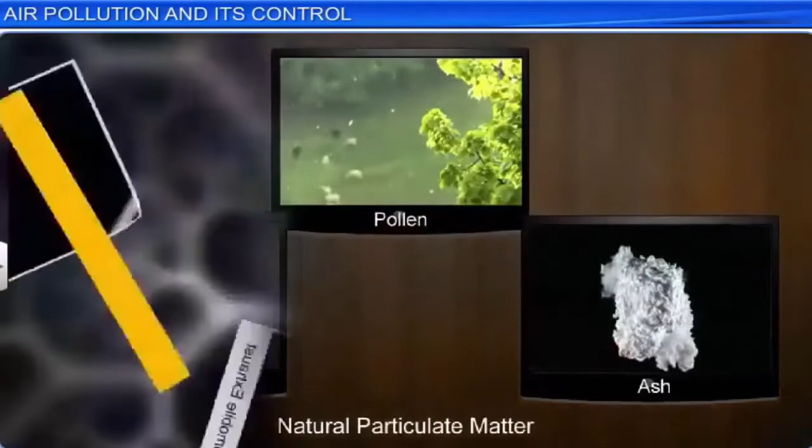Substances that bring about such undesirable changes are called pollutants. The air we breathe has become highly polluted over the last decade due to air pollutants such as automobile exhausts, chemicals and toxic gases from industries, and natural particulate matter such as dust, pollen and ash. These pollutants not only pollute the air, but also have detrimental effects on all living organisms.

Depending on the concentration of the pollutants and the duration of exposure, plants and animals are affected in different ways. When plants are exposed to polluted air, they may exhibit leaf blade damage, cellular collapse, premature aging, reduced growth and crop yields, or the plants may even die.

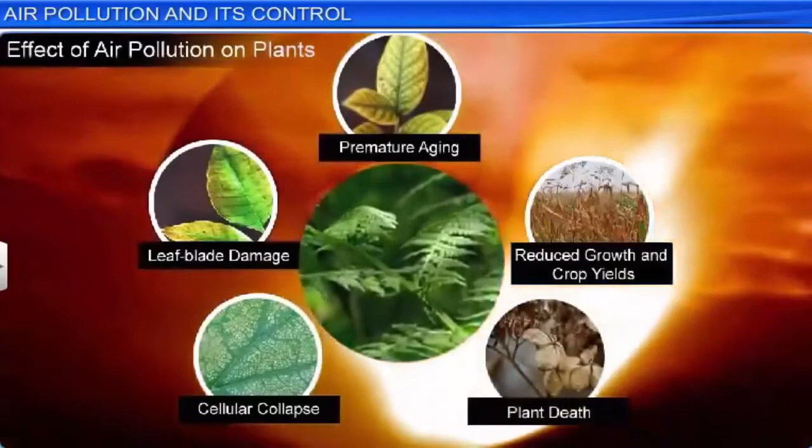Like plants, the harmful effects of air pollutants are seen in animals, including human beings. Eye and nasal irritation, headache, shortness of breath, and respiratory diseases are some of the harmful effects of air pollutants. Every year, the health of people and roadside plants has been deteriorating due to a continuous rise in air pollution. So, how do we make our environment healthier?

In 1986, our government passed the Environment Protection Act with a view to take preventive actions to control environmental pollution. This act made several industries and smelters adopt various methods to separate or filter particulate and gaseous matter that were released into the atmosphere through their smokestacks.

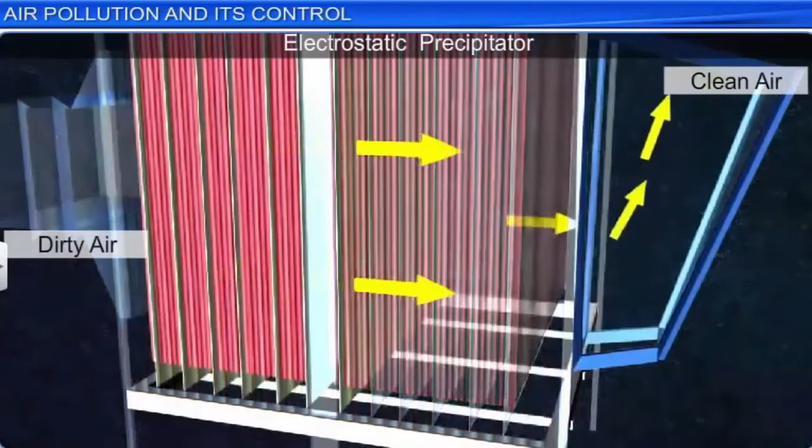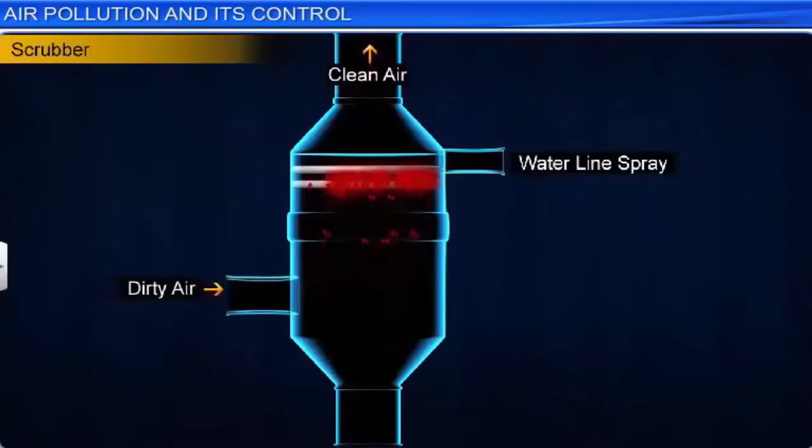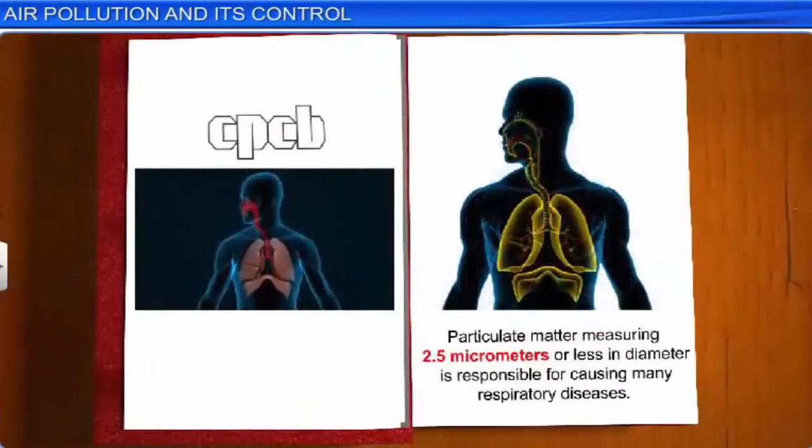One of the most widely used methods to filter particulate matter uses an electrostatic precipitator, which is capable of removing over 99% of particulate matter present in industrial exhaust. Another method requires the use of scrubbers. However, this method is incapable of removing very tiny particulate matter. According to the Central Pollution Control Board, or CPCB, particulate matter measuring 2.5 micrometers or less in diameter is responsible for causing many respiratory diseases.

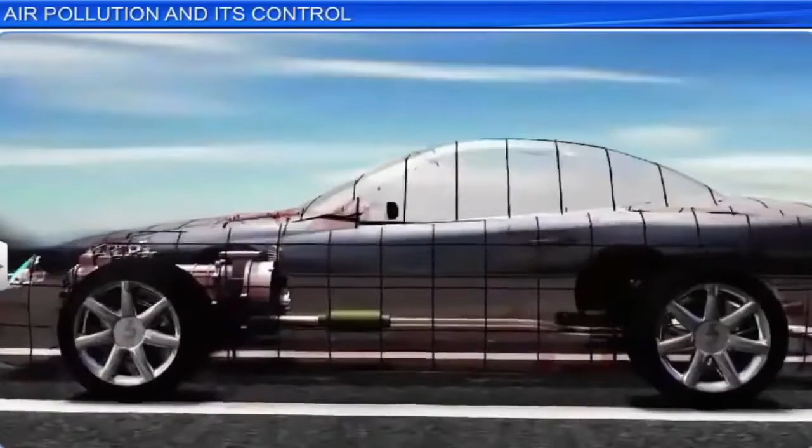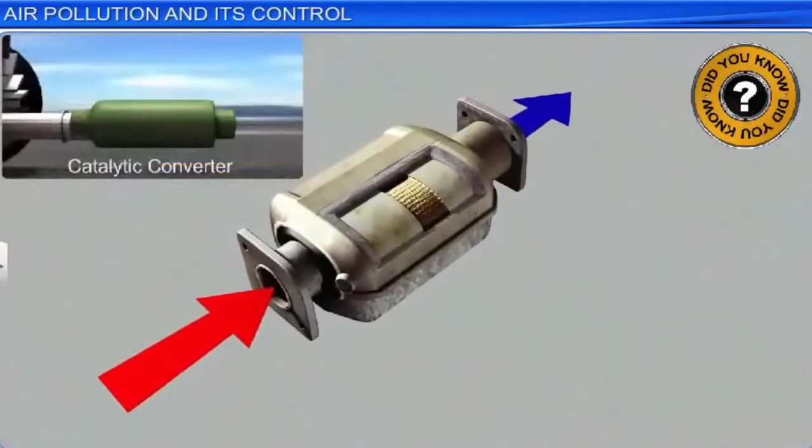Apart from pollutants released from industries, automobile exhausts are also a potent source of air pollution. With the ever-increasing number of vehicles in our country, it has become essential to take proper measures to minimize the release of vehicular exhausts. For instance, the use of catalytic converters and unleaded petrol or diesel has helped reduce vehicular pollution considerably. Did you know that catalytic converters contain catalysts made of expensive metals such as platinum, palladium, and rhodium?

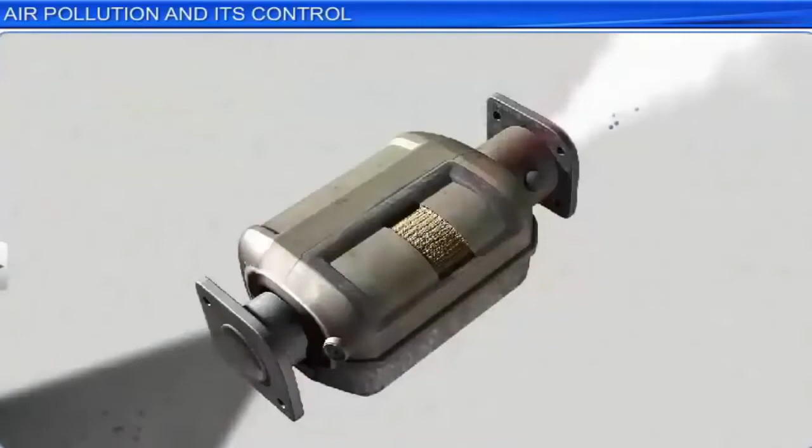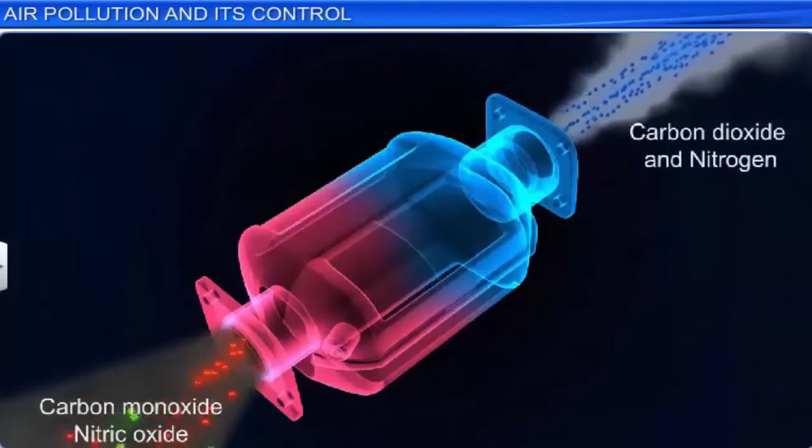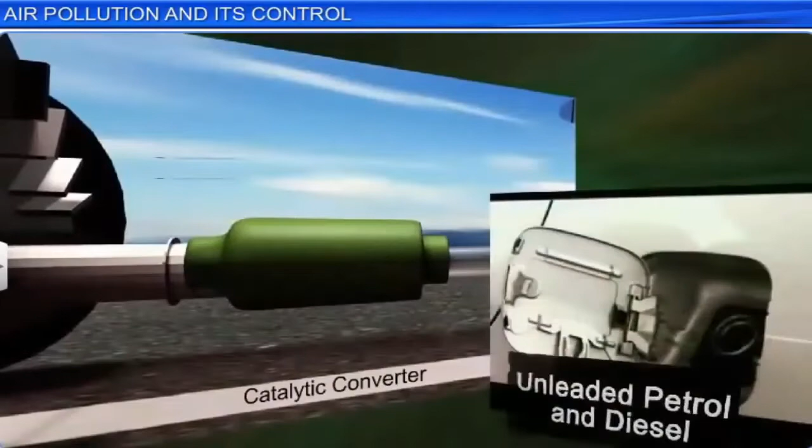When fitted into vehicles, a catalytic converter changes poisonous exhaust gases such as unburnt hydrocarbons into carbon dioxide and water. Likewise, carbon monoxide and nitric oxide are converted into carbon dioxide and nitrogen gas respectively. Catalytic converters thus reduce the emission of poisonous gases. However, vehicles fitted with catalytic converters should use unleaded petrol, as lead in the petrol inactivates the catalyst.

In addition, the use of compressed natural gas, or CNG, has also proved very helpful in reducing air pollution. Interestingly, the use of CNG was accelerated when a public interest litigation was filed in the Supreme Court of India due to serious air pollution problems in Delhi in the 1990s. The court asked the government to take appropriate measures in a specified time frame, which also included converting all diesel buses to CNG buses. In fact, by the end of 2002, all buses in Delhi were running on cheaper and more efficient CNG.

Besides the use of CNG, unleaded petrol and catalytic converters, the government of Delhi has also taken several other measures to control air pollution. This includes the use of low-sulfur petrol and diesel and the implementation of stringent pollution level norms for vehicles. Moreover, the Indian government formulated a new auto fuel policy to reduce vehicular pollution in other cities as well. This policy was based on the European standards, or Euro norms, and took effect in 2000. These norms are more stringent and required vehicle engines to be upgraded. The implementation of these stringent norms has considerably improved air quality.

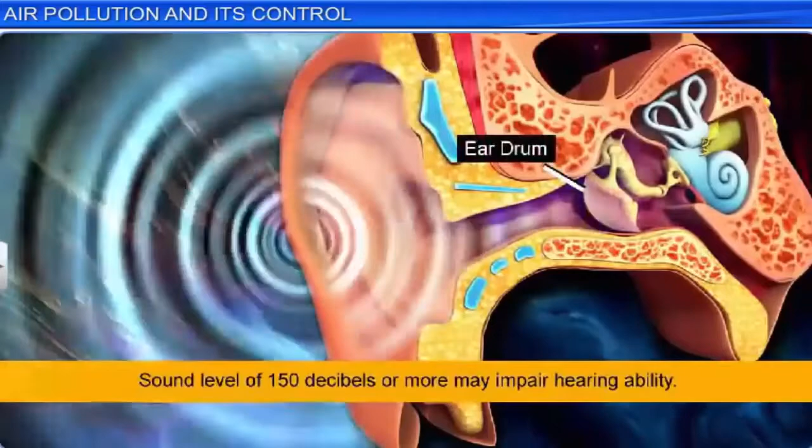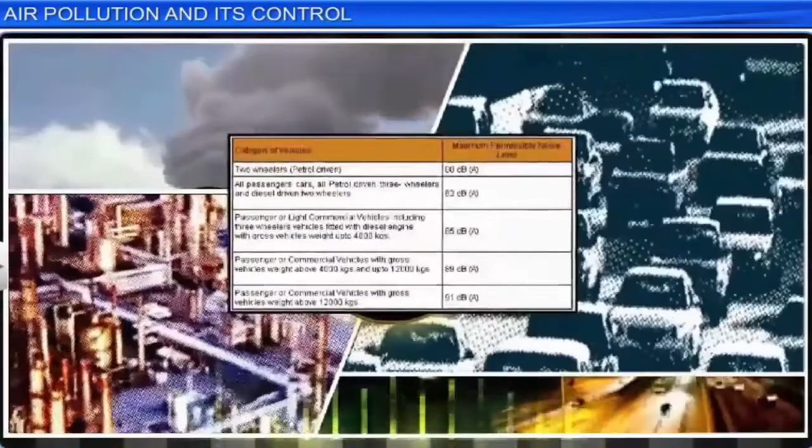In fact, even prolonged exposure to lower sound levels, such as drilling and industrial noise, could have the same effect. Noise also causes sleeplessness, stress, increased heartbeat, and an altered breathing pattern. Considering these harmful effects, the government has taken stringent measures to regulate sound levels in cities as well as industrial belts.

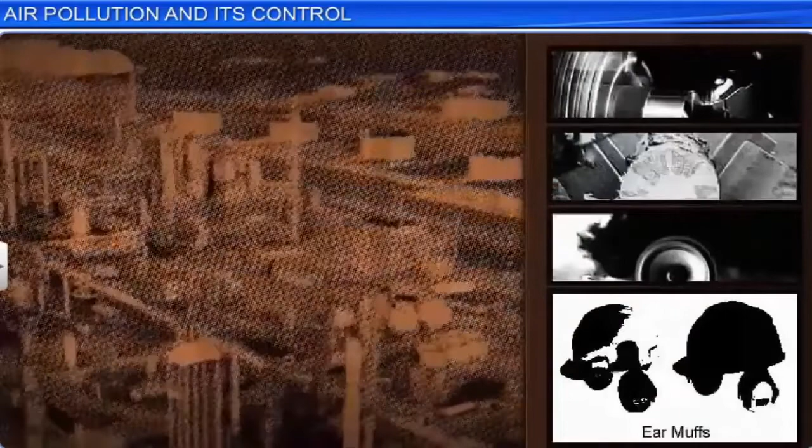For instance, in cities, the areas around hospitals and schools have been declared no horn zones, and time limits have been set for the use of loudspeakers. Industries have also been encouraged to use sound-absorbent materials, and workers too, who are exposed to loud sound levels, are being encouraged by the government to use earmuffs.

Although our country has several legislative measures to prevent and control air pollution, it is our individual responsibility to control pollution levels to ensure a healthy environment. Did you know that less than 1% of the fresh water on Earth can be directly used for human consumption?

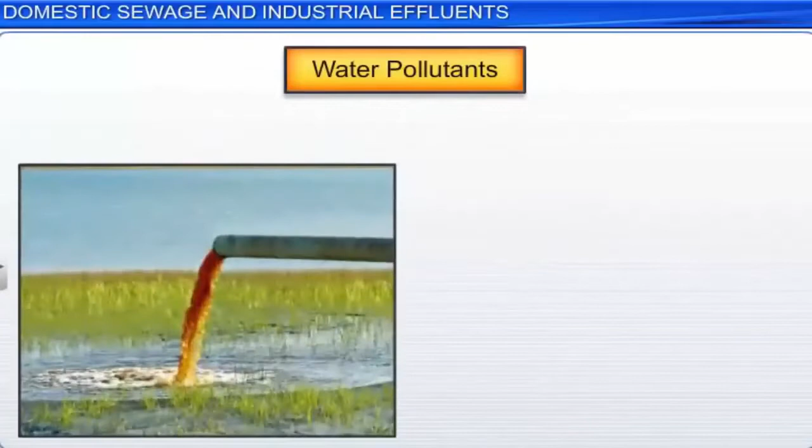Rapid urbanization and industrialization has brought into focus the consequences of environmental pollution. The problem is enhanced by the fact that most water bodies have become contaminated with a variety of pollutants. Pollutants flowing into water bodies are broadly classified as domestic sewage and industrial effluents.

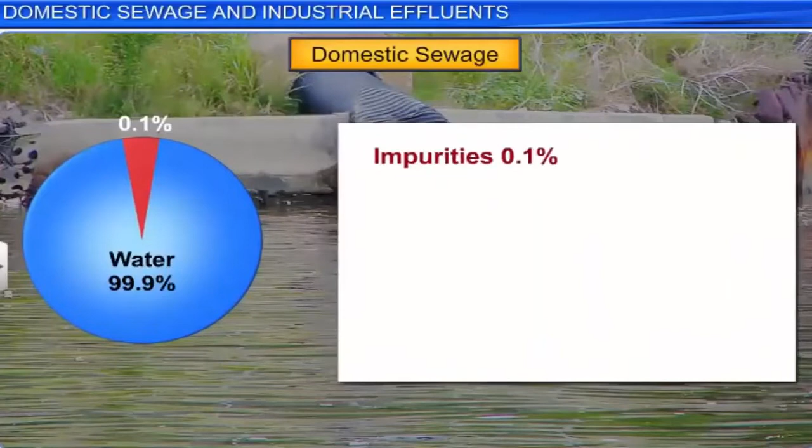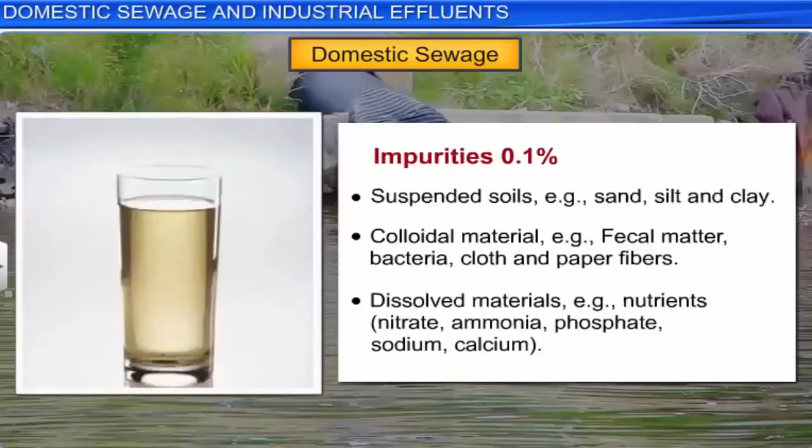The term domestic sewage refers to wastewater that drains from houses in a town or city. This domestic sewage contains about 99.9% water and 0.1% impurities such as suspended solids, colloidal and dissolved materials. Sadly, this small percentage of impurities makes water unfit for human consumption.

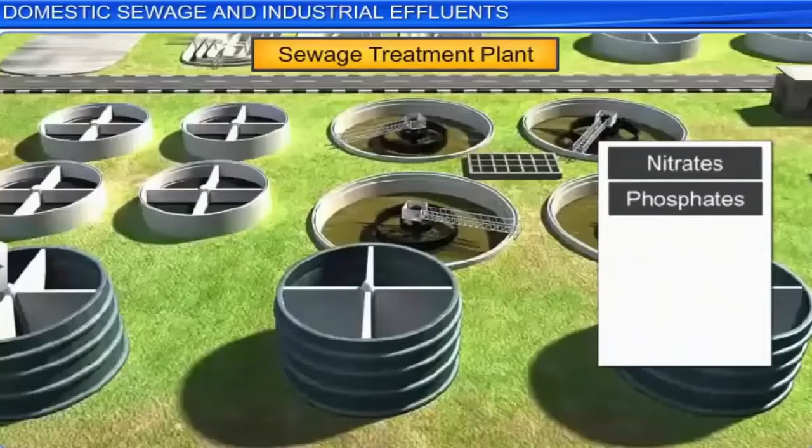Every town or city has sewage treatment plants for the removal of these pollutants before they are released into rivers or the sea. The removal of solids is relatively easy compared to dissolved salts such as nitrates and phosphates, and toxic metals such as lead and mercury, and organic compounds such as dyes and pesticides.

Apart from these pollutants, microorganisms also form a primary component of the sewage. These microorganisms decompose and treat the organic sewage matter by using it as a substrate to multiply. However, during this process of decomposition, microorganisms require a lot of oxygen, which is measured in terms of biochemical oxygen demand, or BOD.

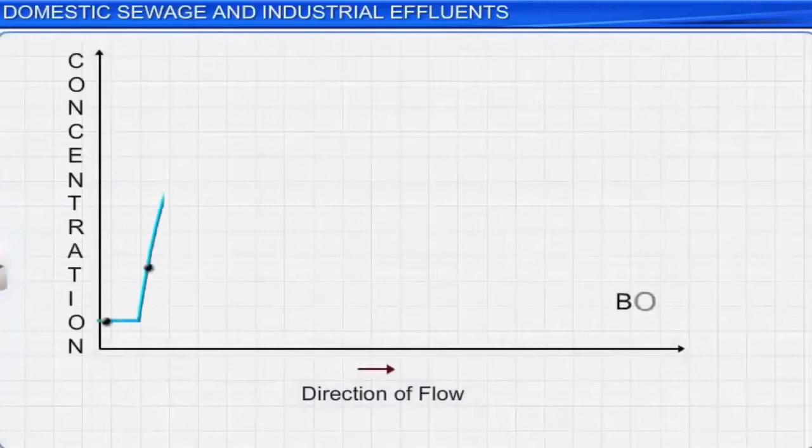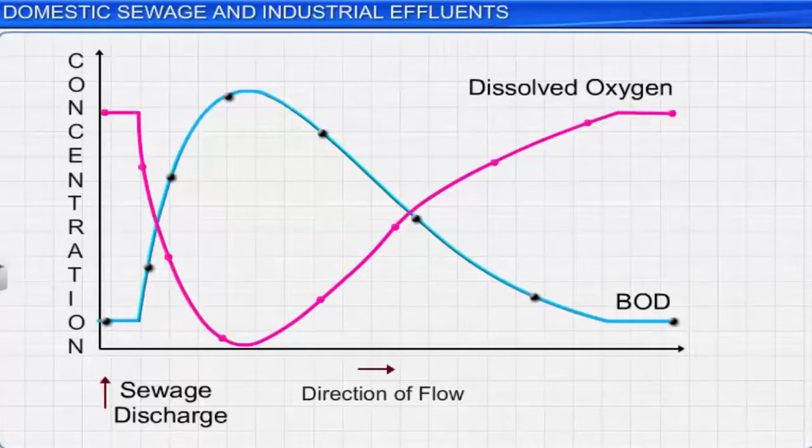The concentration of BOD in the sewage water discharged into the water is high. A high concentration of BOD automatically translates into low amounts of dissolved oxygen, or DO, as depicted in this graph. High BOD and low DO ultimately cause the death of fish and other aquatic creatures.

Another reason for the mortality of aquatic fauna is algal bloom formed due to large amounts of nutrients such as ammonia, nitrates, nitrites, and phosphates in water. These algal blooms impart a distinct color and odor to the water bodies. Moreover, they deplete all the dissolved oxygen vital for aquatic life.

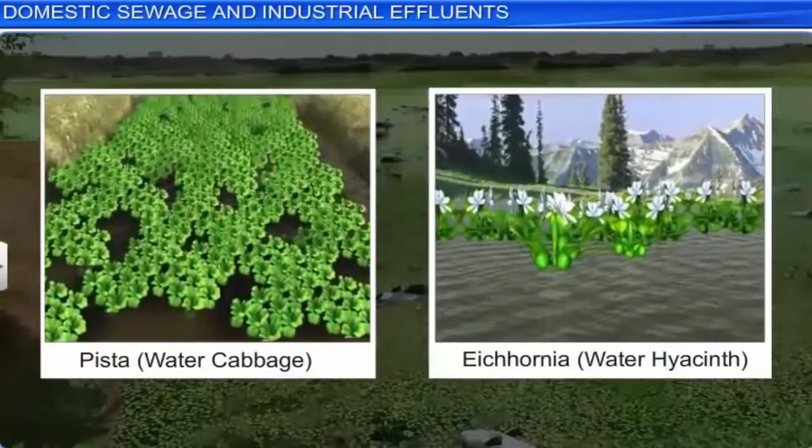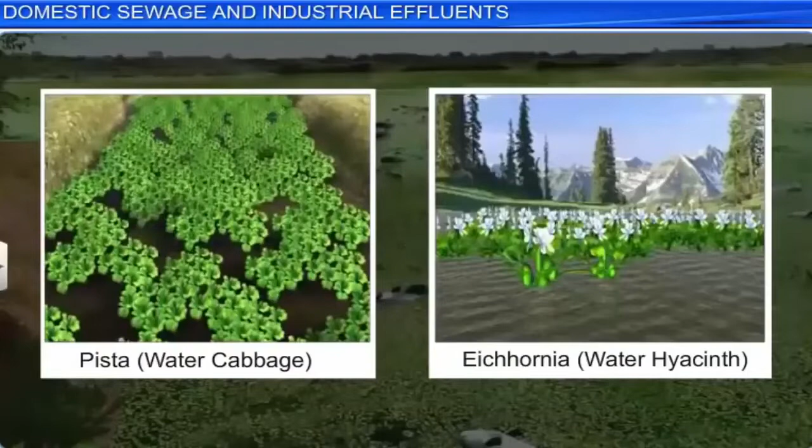Besides these floating algal blooms, you also see plants such as water cabbage and water hyacinth floating on water bodies. Decades ago, these plants were introduced in water for their beautiful shape and flowers. However, they have now become troublesome aquatic weeds that are spreading rapidly and causing an imbalance in the ecosystem dynamics of water bodies.

In addition to sewage, human activities such as agricultural runoff accelerate the aging process of lakes. This phenomenon is called cultural or accelerated eutrophication. Sewage wastes may also contain pathogenic protozoa, bacteria, and viruses that are discharged from hospitals and houses into the water, which may cause the outbreak of serious diseases such as dysentery, typhoid, jaundice, and cholera.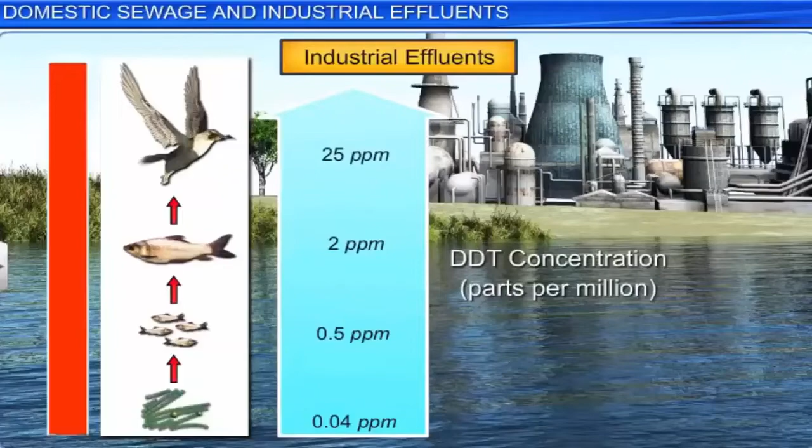High concentration of DDT disturbs calcium metabolism in birds, which causes thinning of eggshells and their premature breaking. This eventually results in a decline in bird population. Apart from releasing toxic pollutants, industries such as thermal power plants also release heated or thermal wastewater into water bodies.

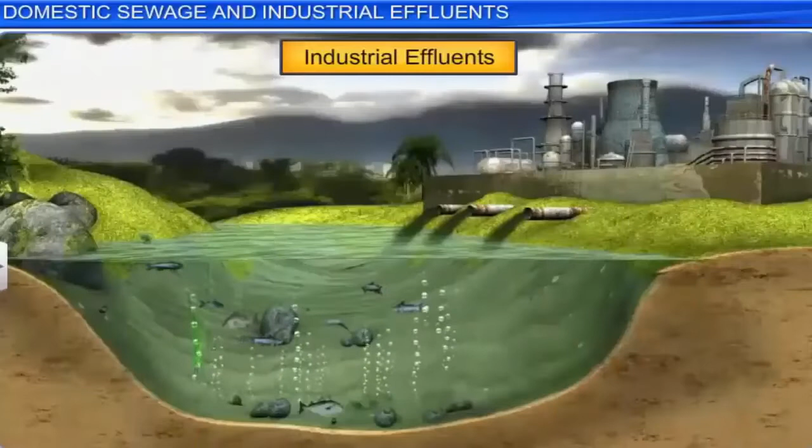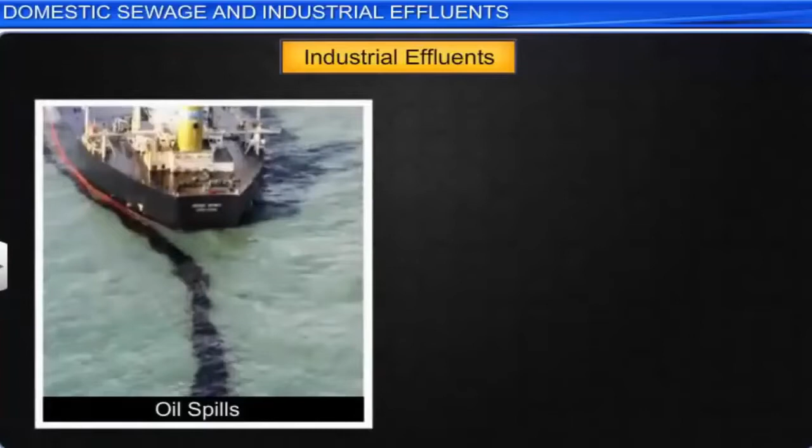This wastewater has various adverse effects on aquatic life. It can kill or reduce the number of organisms sensitive to high temperatures, and can also damage indigenous flora and fauna. Apart from thermal wastes, oil spills too can contaminate water bodies and, in the process, kill aquatic life. The decomposition of these dead organisms further depletes the water's dissolved oxygen, choking the water body to death.

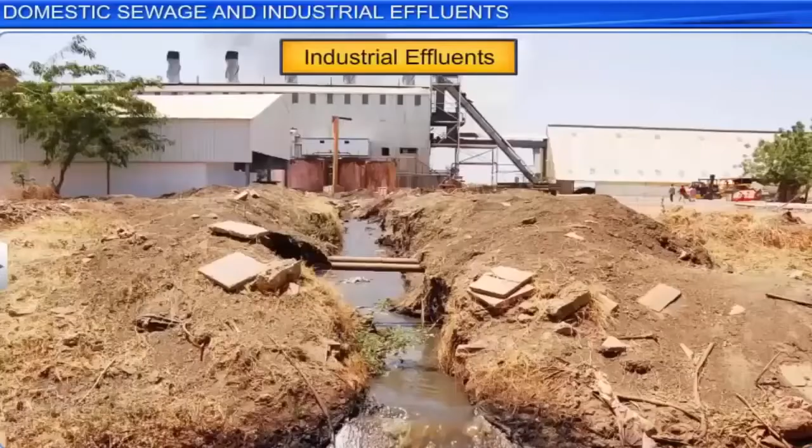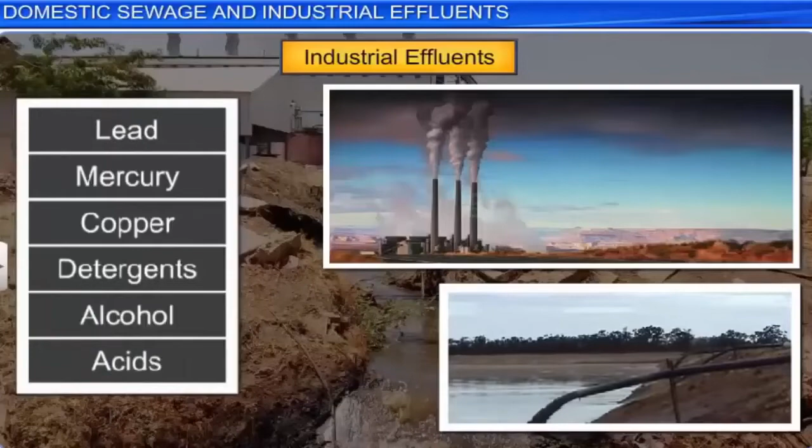We human beings have been polluting water in various ways, and without stringent measures, it will be difficult to protect it. Industries such as paper manufacturing, petroleum, sugar and textile mills release tons of wastewater that contain toxic metals such as lead, mercury and copper, along with detergents, alcohol and acids into water bodies. These pollutants are highly toxic to aquatic fauna and other animals, including human beings.

An example of water toxicity and its effects can be seen in Japan. In the 1950s, several people fell ill and even died due to the consumption of mercury-contaminated fish. This toxic methyl mercury was released into the water by industries, which caused the Minamata disease that caused numbness of limbs, lips, blurring of vision, and mental disorders.

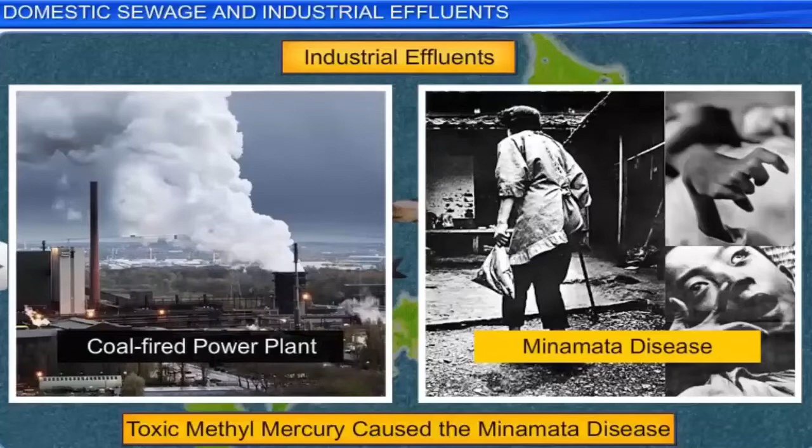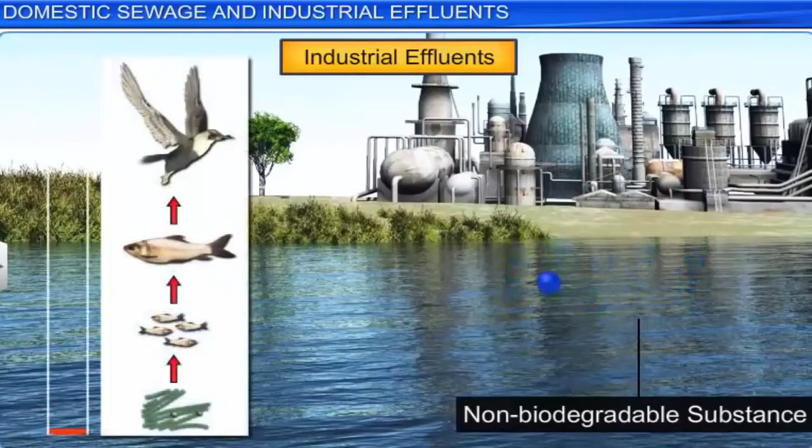Toxic substances such as mercury, cyanide, and DDT are not biodegradable and get incorporated into the food chain, causing biomagnification of the toxicant. Water, water everywhere, but not a drop to drink.

This situation may soon turn into a reality if we don't take steps to control water pollution, which is the result of rapid urbanization and industrialization in the last few decades. The problem of water pollution has worsened ever since large quantities of domestic sewage and industrial wastes have been dumped into water bodies.

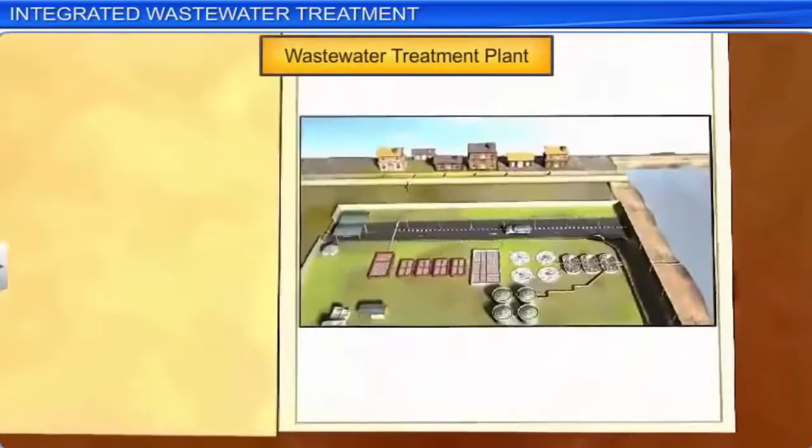Realizing the importance of clean water, the government passed the Water Prevention and Control of Pollution Act in 1974. This act made it mandatory to treat wastewater in treatment plants. The treatment consists of 3 stages: primary, secondary, and tertiary.

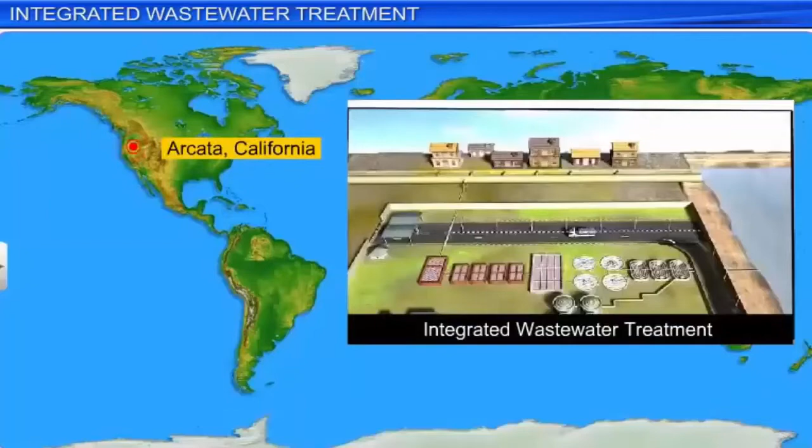In fact, most cities in the world have developed a combination of natural and artificial processes to treat wastewater. Let us take a look at such integrated wastewater treatment in Arcata, situated along the northern coast of California. To find a solution to wastewater, the people of Arcata collaborated with biologists from the Humboldt State University to integrate wastewater treatment within a natural system.

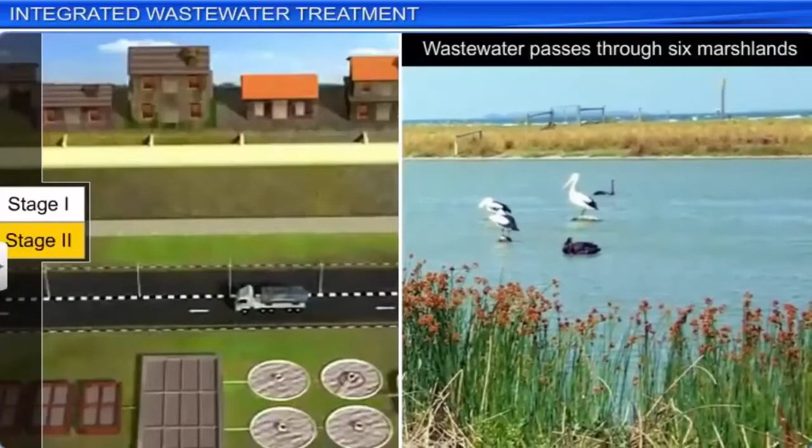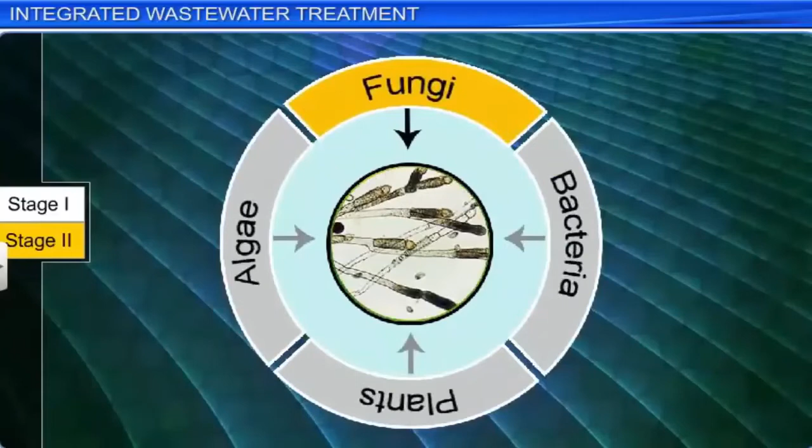The wastewater was treated in 2 stages. The first stage included treatments like conventional sedimentation, filtration, and chlorination. While in the second stage, the wastewater was passed through 6 connected marshes spread over 60 hectares of marshland. These marshes were developed using appropriate plants, algae, fungi, and bacteria suggested by the biologists.

As wastewater passed through the series of marshes, it was naturally purified by plants, algae, fungi, and bacteria, which helped to neutralize, absorb, and assimilate the toxic pollutants such as heavy metals. Besides cleaning the wastewater, these marshes have developed into a sanctuary with a large number of fish, animals, and birds inhabiting them, thereby increasing the biodiversity of this region.

This sanctuary was taken care of by a citizens group called Friends of the Arcata Marsh. In this manner, the people of Arcata were able to treat the wastewater they generated. Do you know how much wastewater is used or generated by an individual daily? Close to 150 liters. In fact, a large amount of water is used in toilets. What if you could save that amount of water?

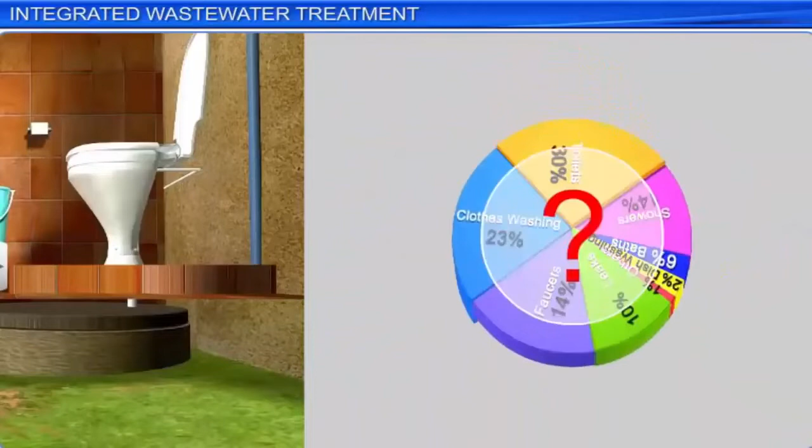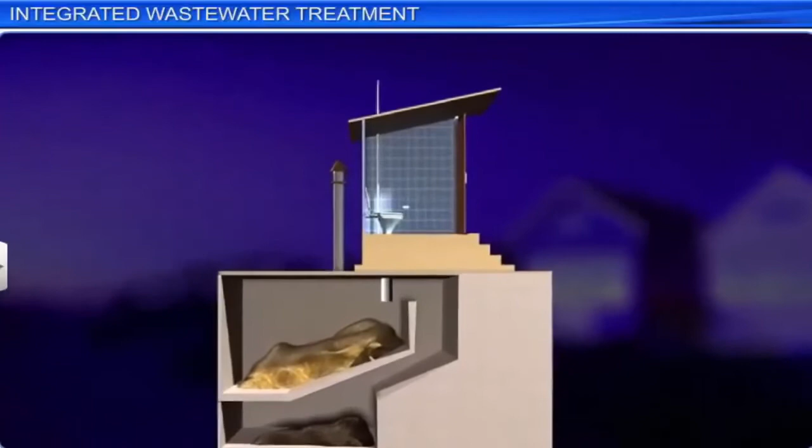The answer is ecological sanitation, or EcoSan, a sustainable system for handling human excreta by using dry composting toilets. Such EcoSan toilets not only eliminate wastewater generation, but are also practical, hygienic, efficient, and cost-effective. In addition, the natural fertilizer produced from recycled human excreta is used in fields, which forms an excellent substitute for harmful chemical fertilizers.

At present, this system is being efficiently used in many areas in Kerala and Sri Lanka. In this manner, integrating natural systems to treat wastewater is an efficient, practical, and cost-effective way to handle, prevent, and reduce water pollution.

Anything you throw in your trash bin, whether paper, plastics, glass, metals, rubber, leather, textiles, and leftover food, is known as solid waste. Such solid wastes are dumped in large garbage bins placed in your locality. Apart from households, waste is also generated by offices, schools, and hospitals, which is called municipal solid waste. This waste is then collected by the municipality and ultimately dumped far away from the city.